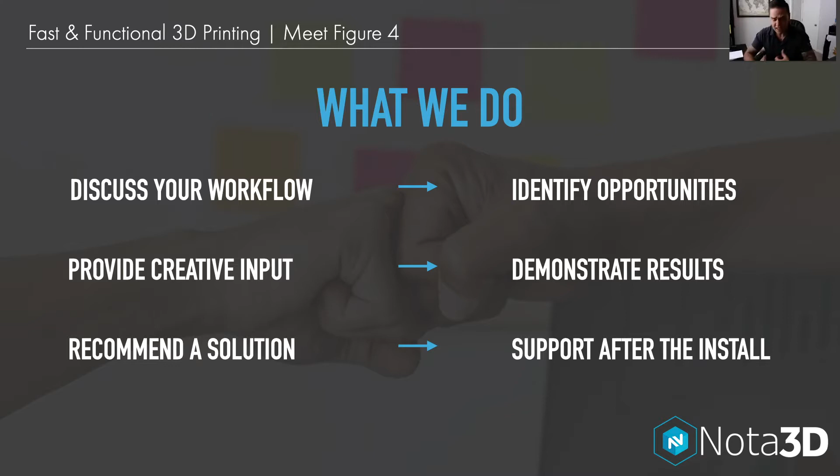So today I'm going to introduce you guys to the Figure 4, and we're going to dive into where it's used and why. And then we're going to have Joe Corbell walk us through the 3D Sprint software that comes with all of our machines. And he's going to show you some cool features with that. And then we'll wrap up with an interview with Derrick Timm from Motorola, who's a current Figure 4 customer, and he's going to talk about his current experience with the equipment and the impact that it's made on them.

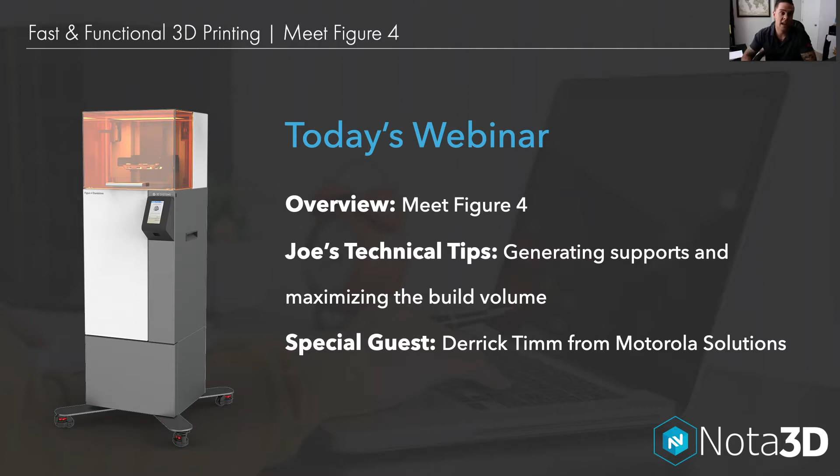Figure 4, even though it's a very new technology, it's actually got a pretty cool story. So Figure 4 was actually thought up back in the late 80s by Chuck Hull, who is the founder of 3D Systems and the creator of 3D printing. If you didn't know, Chuck Hull invented SLA back in 1983, which was the first 3D printing technology.

So the way the Figure 4 technology works is there's a UV projector below, and then there's a resin tray with a clear membrane on the bottom, and obviously that holds the resin. And then you have the build tray on top.

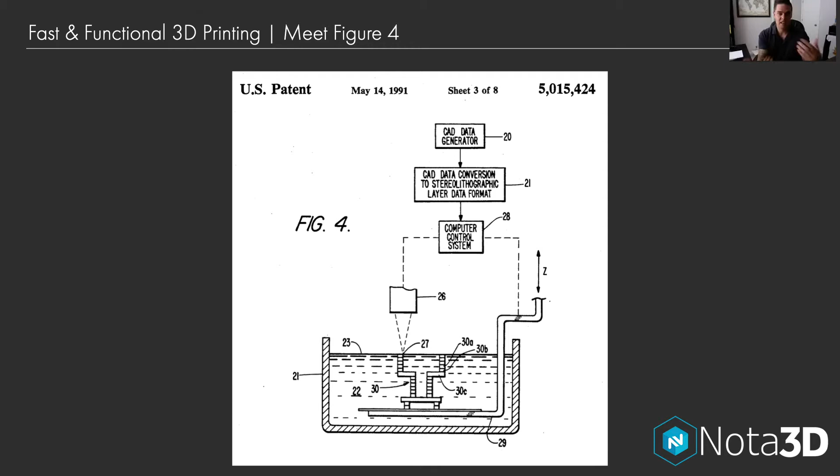The build tray lowers into the resin tray until there's a very thin layer of oxygen or resin between the membrane and the build tray, and then the projector flashes, curing the UV resin, and it's curing an entire layer all at once. So it's not drawing and filling like a lot of the laser-based or extrusion-based technologies.

So though there are many reasons why companies do choose to implement Figure 4, there's 4 key reasons that really get people's attention when we're talking about the Figure 4. These are the reasons why most companies find that it's a good fit for them. Speed is obviously the #1 factor with Figure 4. This machine is super fast.

Unlike many of the other technologies that I was explaining, which are either laser or extrusion based, they have to outline and then fill the parts. Figure 4 is actually using a projector, and it's flashing the entire layer, and that's why we can get the continuous build that's going to be really, really fast.

So it doesn't matter whether there's one part on the tray or there's 10 parts on the tray. It's going to build in the same exact build time. This machine will print up to 4 inches per hour in the Z-axis, which is crazy fast compared to other technologies.

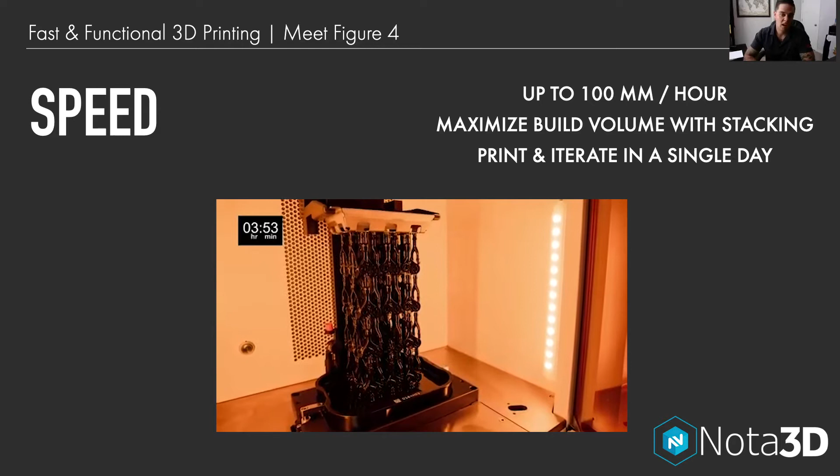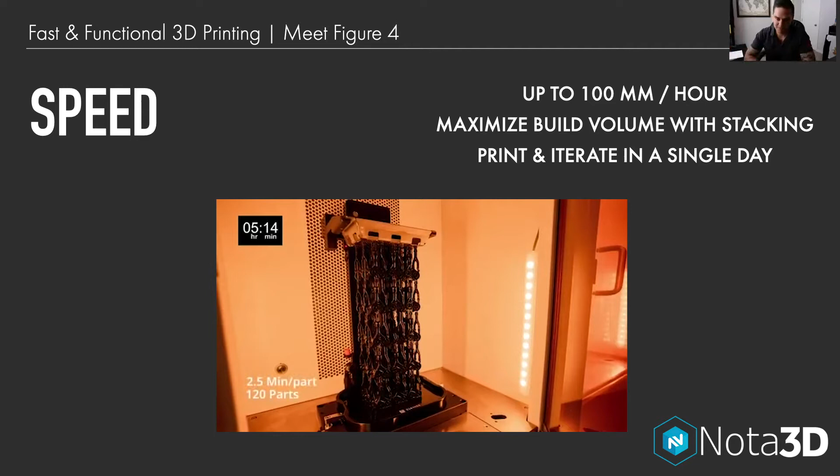And you can actually nest parts vertically to maximize throughput and print numerous iterations a day. Joe's going to dive into the stacking and nesting vertically when we get to the software portion. But we have customers that have brought in the Figure 4, and a lot of times they would have to press print overnight, come in the next morning and have their part done, and then they'd have to make a change and maybe press print by lunch, and it wouldn't be done before they left, so they'd have to wait for the next day.

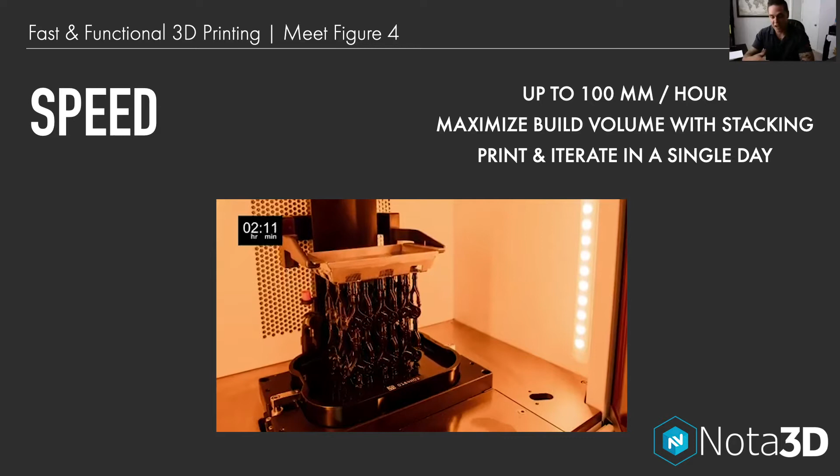So Figure 4 gives you the ability to come in the morning, press print, test it, make revisions, and print the second iteration all before lunch. So that really gives you a huge advantage.

And this is a great example, very relevant with everything that's going on, but rarely is speed more important than when it comes to saving lives. An Italian hospital found an urgent need for supplies when they ran out of a key component for the oxygen tubes, and the supplier wasn't able to keep up with increased demand, so they had to turn to 3D printing. The original part was brought to 3D Systems at 11 a.m. so they could get to work reverse engineering it, and by 7 p.m. they were able to present the hospital with 3D printed versions, which were successful. So production immediately ramped up using medical grade materials on the Figure 4.

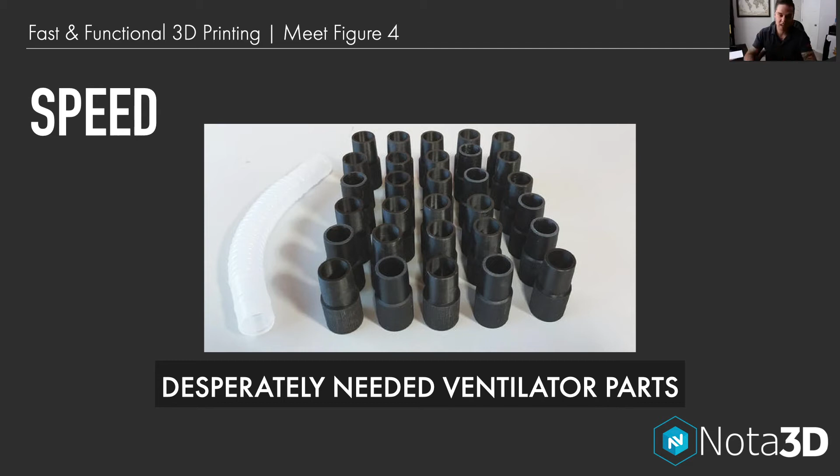So that's a pretty awesome story that in about 8 hours they were able to take a part, reverse engineer it, test it, prove that it worked, and then start mass producing it on a 3D printer.

And then another huge factor for Figure 4 is the material options. So right now Figure 4 offers 13 advanced materials. We have several more slated for 2020 and 2021. Figure 4 offers a wide variety of production-ready UV stable materials that are being used for low-run production pieces. We have high-temp materials with heat deflection temps of 300°C. We also have robust tear-resistant elastomers, and some great functional prototyping materials. Another thing too is we have a handful of biocompatible Class 6 autoclave capable materials as well.

And then, a little bit more unique, very niche applications, but we do have some application specific materials such as our J-Cast Green for investment casting for jewelry. And then we also have a material that is designed for eggshell molding. So that's our eggshell amber material. Eggshell molding is an application where a company needs true silicone, and that's kind of been an elusive thing in the 3D printing industry, getting a true silicone that actually functions and looks like a molded product.

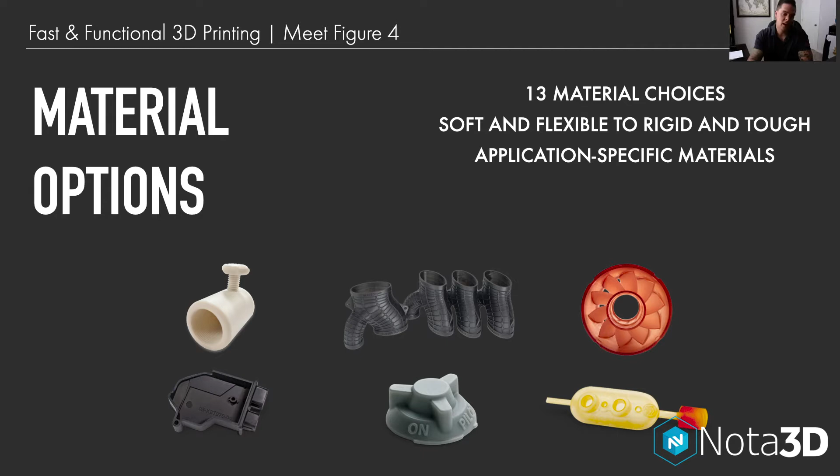Since Figure 4 uses a small resin tray, this allows for extremely fast material changeovers with absolutely zero waste. So for the Figure 4 standalone, essentially all it is is removing one resin tray out of the machine, placing it into a storage container that comes with it for safekeeping, and it doesn't let any dust or light get in there. And then you pull out a second resin tray with your new material already loaded in it, put it into the machine, and you're ready to go. This can be completed in under 20 seconds.

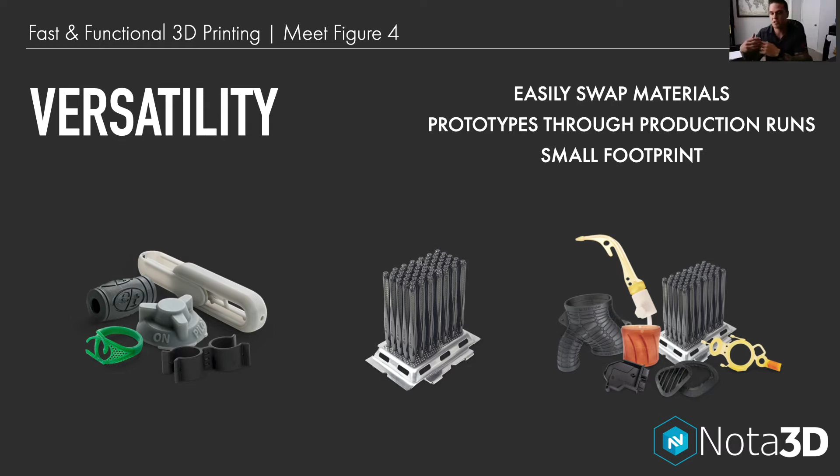And our materials allow for a vast range of applications from prototyping to production, automotive to healthcare, injection mold plastics to eggshell molding. Figure 4 really gives you the ability to handle multiple applications and do it quickly. Plus, it's got a small footprint, so it really can fit anywhere. It doesn't require any special ventilation or any special equipment to be able to run.

And then, of course, pricing is a big factor. So, we offer full turnkey packages on Figure 4 below the 30K mark. They're available to purchase outright, or we can also do leasing. And where we see leasing really fit is some companies will lease a machine, lease to own, and the revenue that they're going to generate or the savings that they're finding will exceed the monthly cost. So essentially, it's getting paid for as you go along.

And you can also grow with the Figure 4. So we have the Figure 4 standalone, which is our entry level. This is a self-pour machine, and it's very easy to run, but it's one unit. It doesn't connect with anything else.

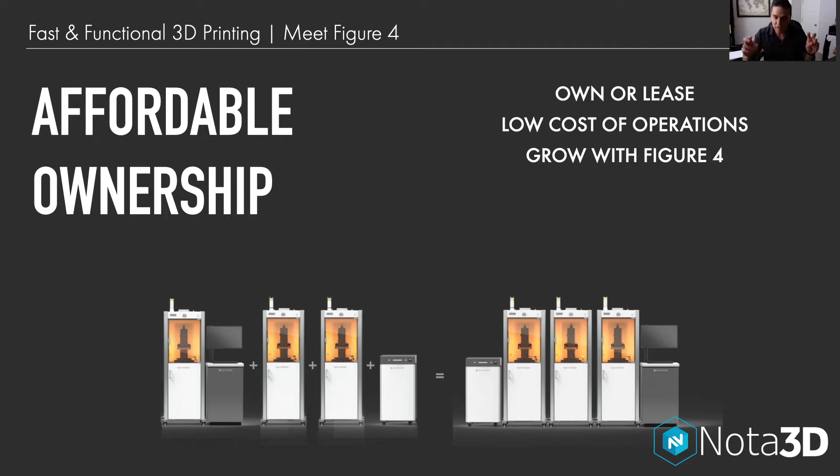And then we also have one level above that called the Production. This is a fully automated, fully customized, tailored to you solution where essentially you press print, it prints. There's a robotic arm that cleans the part, post-processes the part, and you pretty much just have the parts at the end of it. So we do have upgrade paths. So if you want to start with a Figure 4 Standalone, we do have trade-in paths and ways to grow with you guys. So this is something we see customers doing when they're wanting to kind of get their feet wet and then move into higher run production.

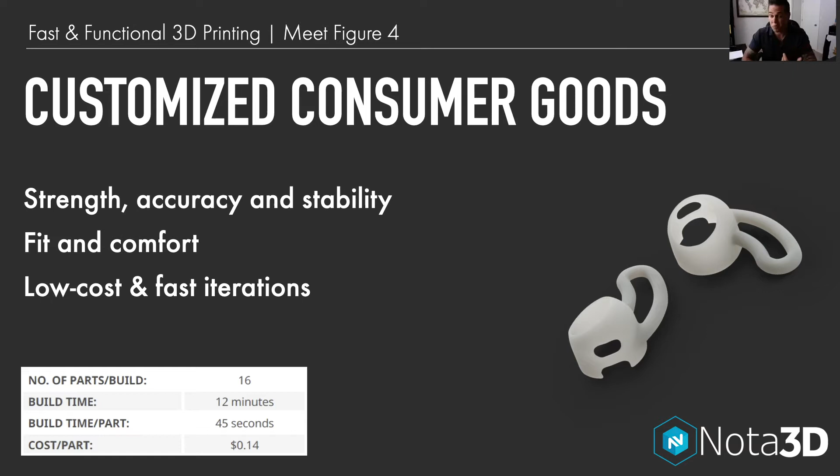Figure 4 allows for customized or personalized products because of the speed and the accuracy, and due to the production-ready materials, it really gives you a customizable production. So you're seeing this make a splash in industries like hearing aids, and as you can see from the build stats, we're able to print 16 of these shells in 12 minutes, which is less than 1 minute per part, and about 14 cents per part.

And then this is an area where we're really starting to see things grow, and that's low run production of spare parts or obsolete parts. So this allows companies to create what we call a digital warehouse. So they no longer have to store tools and molds for old products, and they can just store the CAD data on a server and print them as needed.

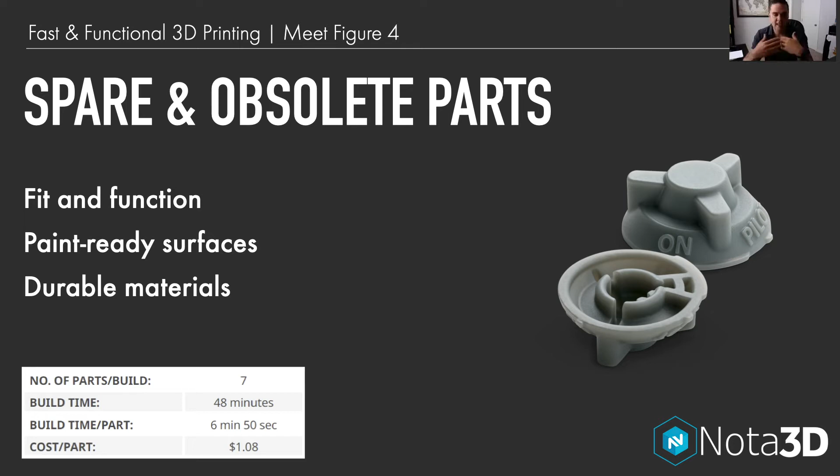So we see this a lot with older legacy products where maybe a machine or a tractor or something is 50, 60, 70 years old. The manufacturer doesn't want to hold on to everything to make these spare parts. So this is where it becomes really, really effective, and the parts can be chromed, plated, so you can really ramp up the spare parts business on that.

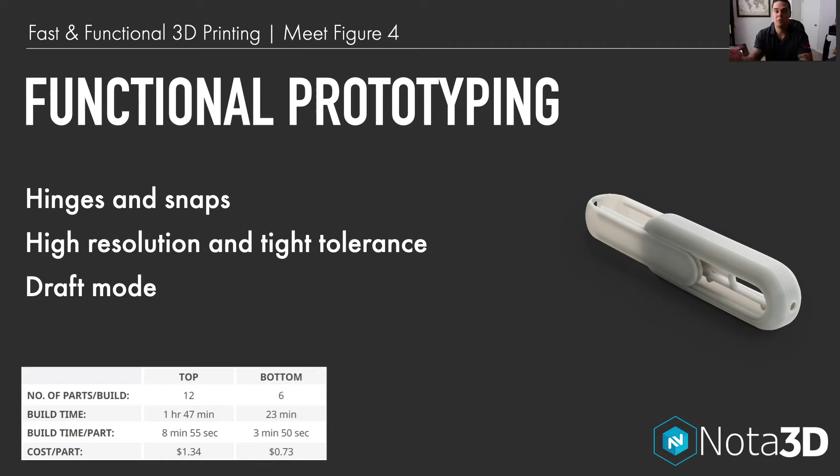Since the Figure 4 has production-ready UV stable materials along with the production accuracy, this makes Figure 4 a great fit for truly functional prototypes. So functional prototypes gets thrown out very loosely nowadays, but the Figure 4 really offers prototypes that need to go out in the field for rigorous, extensive testing, and these are parts that can provide you true feedback on what you would be able to expect from a final molded product. So I think that's really, really important.

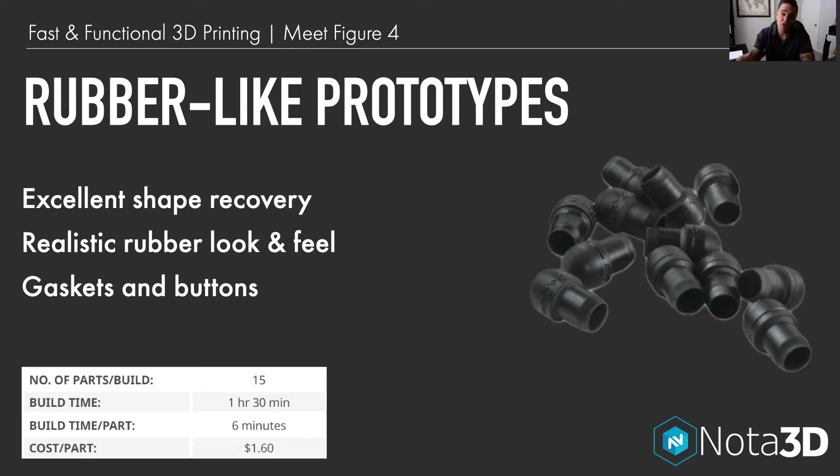And then following up on the functional prototypes, we also have functional rubber-like prototypes. So elastomers have always been an issue in 3D printing. Yes, you can print them, but the tear strength was weak, or it wouldn't hold up to any actual functional testing. But with Figure 4, these are significantly more robust. Still not a true rubber, but it's an incredible improvement to what else is out on the market.

So we also have virtually no waste, and our material can sit in the tray for extended periods of time, unlike the competition that requires you to basically dump out all the material that was not used in that one particular build for specific materials. So, overall, Figure 4 is a great low-cost option. It's inexpensive to run. It's got a low price point for purchase, and it offers a really wide range of materials, fast and accurate builds. So it really gives companies a great advantage.

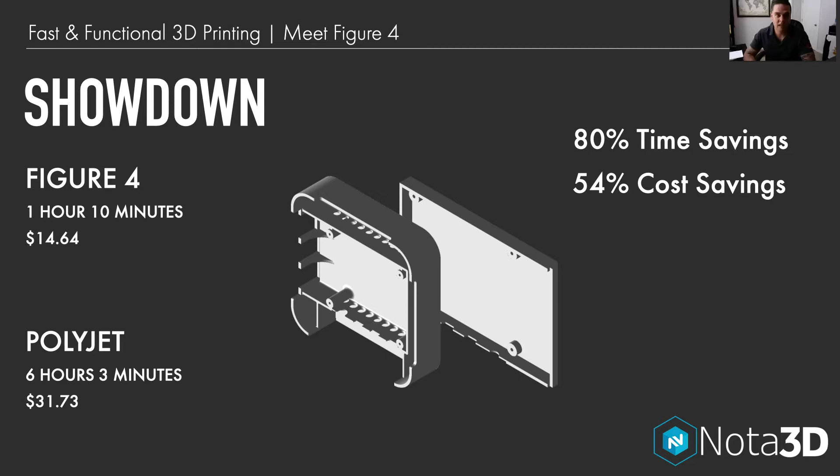So now I'm going to kick it off to Joe. So Joe is our applications engineer over here, and he's going to walk us through 3D Sprint. 3D Sprint is the software that comes with all of our equipment, but there are certain features that are going to be tailored to specific machines.

And so if you joined our webinar last month on MJP, Joe walked through some great features on that. Now he's going to dive into some different features that are specific to Figure 4.

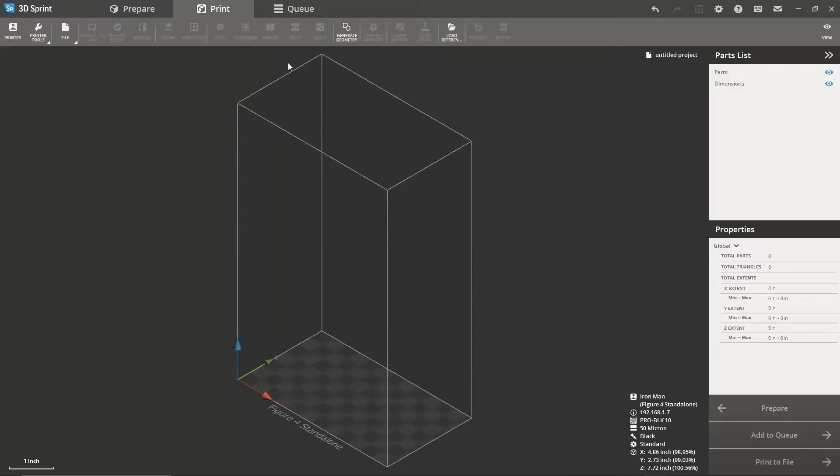All right, so today we're going to jump into modification of support structures as well as nesting, and give an example of what you can do with the Figure 4 as far as custom supports go. The software does a really good job of generating the supports automatically. As you learn the software and the machine, it becomes a little bit easier to dictate where the supports should go, where you're pretty sure you're going to need them to have a successful build.

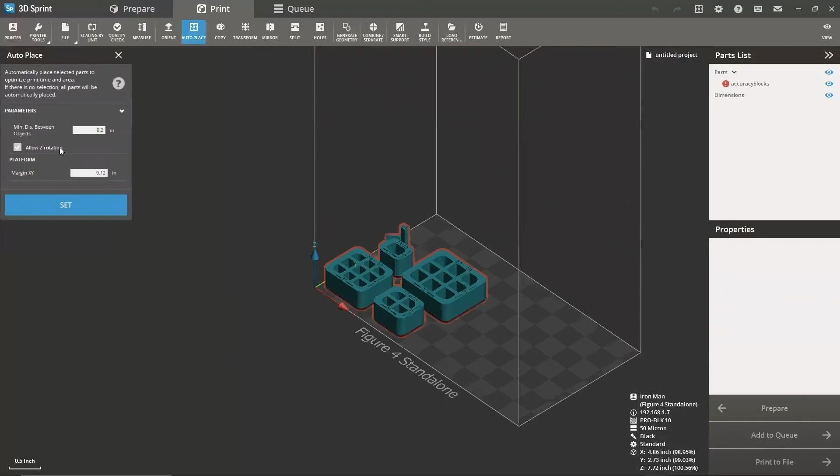So just to get a basic geometry, we can either generate the geometry, or in this case, we'll load our reference parts. It's a preset part to check the calibration of the machine. Really nice and easy. It's outlined in red, so we know it's slightly off the build platform. So we will auto place, allow Z rotation, and that'll center it in the build platform for us. We can see there's a little bit of a buffer between the parts and the build plate. That is for our support generation.

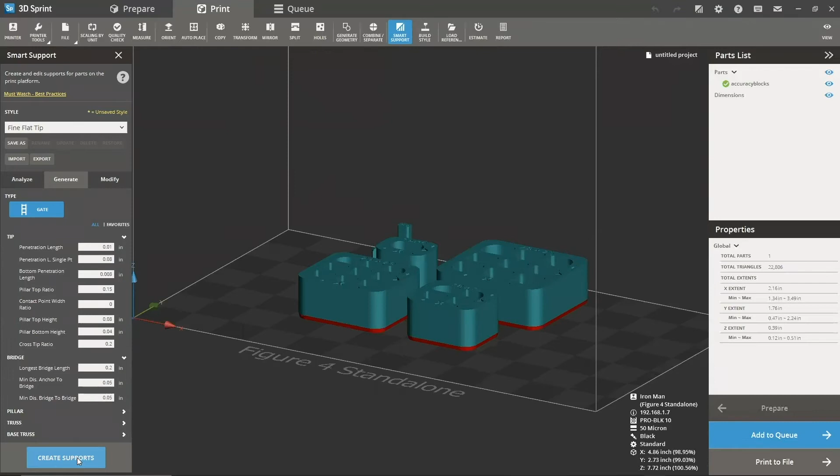There's a number of different presets you can choose from. You can offset the tip penetration length, the single point penetration, a wide variety of different parameters based on your level of knowledge or comfort with custom support generation. I'm just going to roll with the generic support structures here. It generates that, and you see we have our base, our pillars, our touch points, everything you would need pretty well automatically generated.

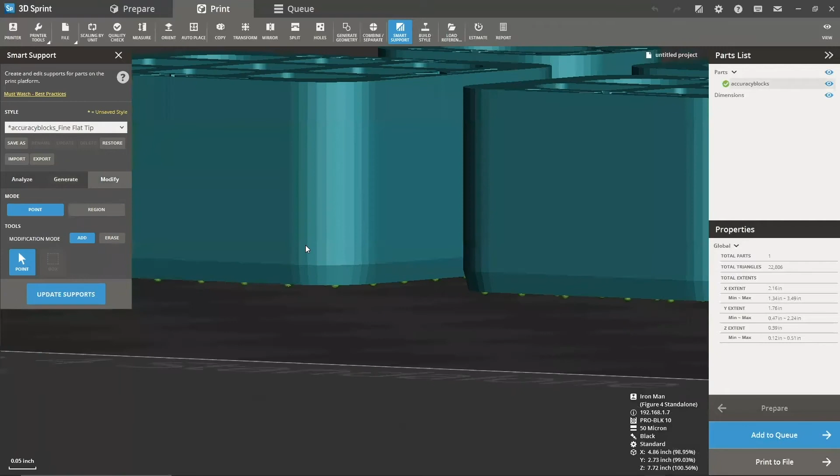From here, we can click over to the Modify tab, and basically anything outlined in red on the parts is going to need support. It's a downward facing angle, so that will have support on it. All of our little touch points here were automatically generated across all 5 parts. We could choose to add or delete points just by clicking. It makes it really easy to add.

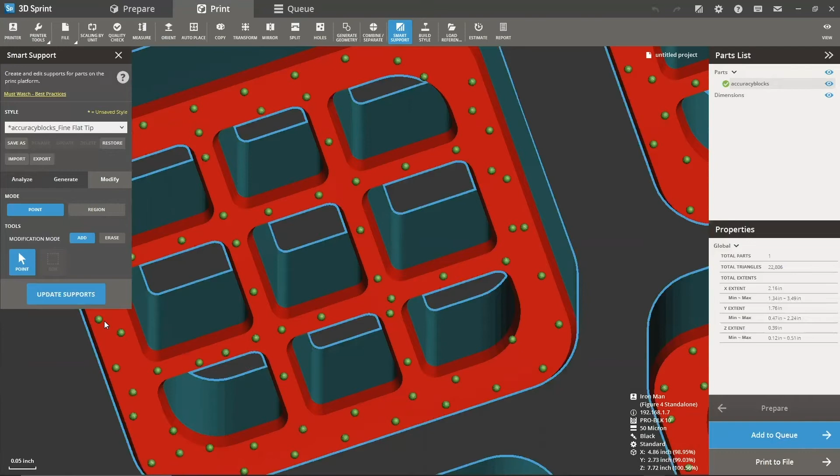If you have a larger part and you fear one of the corners might peel up, you could add support there, or for rounded pieces, you could add support along the edge to make it a true round. Really minimize any issues you might have. Once you're done, click Update Support. I have done it so many times where I've put a half hour or an hour's worth of work into something, not hit update supports, and lost it all. So don't make my mistakes.

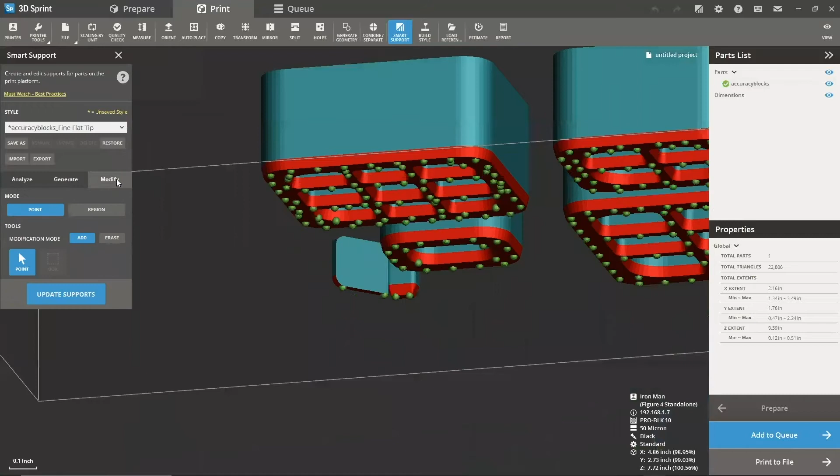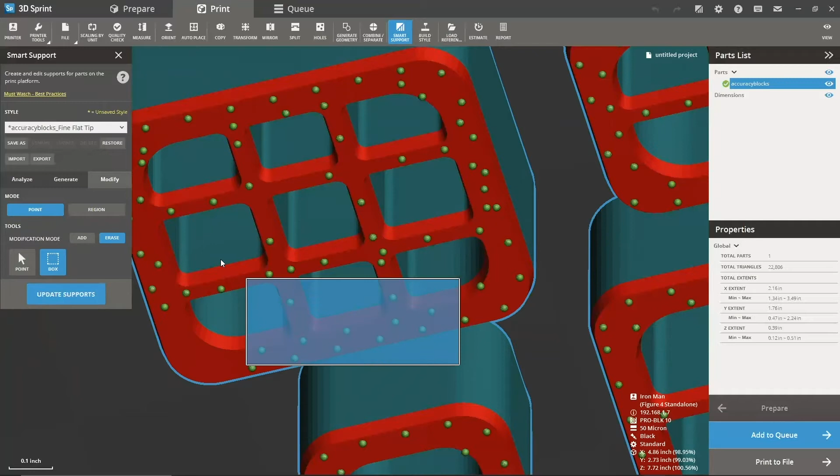Along with adding supports, I mentioned you can delete or erase them. You can go point by point and delete them one by one. Or if you want a quicker method, there's an outline box you could use. Just highlight the points you want to get rid of and get rid of everything there. Again, update supports, and that piece wouldn't have support. It probably wouldn't build, it would just float off into the tray. So in that case, we can highlight it again. And there's our supports again.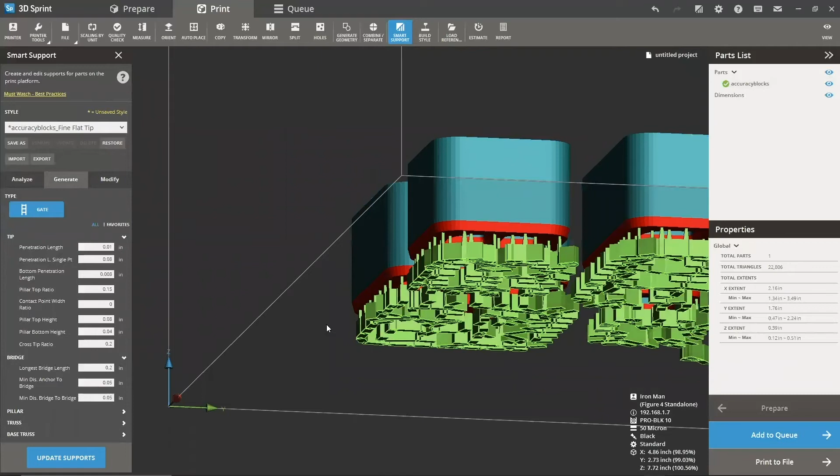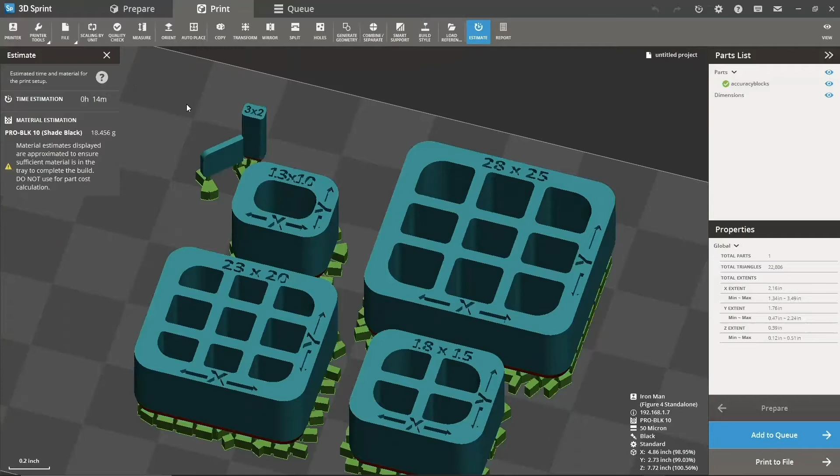From here, we can take our build estimate based on the parameters set for the machine: 50 microns, standard build, about 14 minutes to build these accuracy blocks. You can see the millimeter measurements, 28 by 25 for the big block, 23 by 20 for medium, and so on. To delete the supports, you just highlight, you'll see them outlined in blue instead of green, press delete, and you get rid of the supports again.

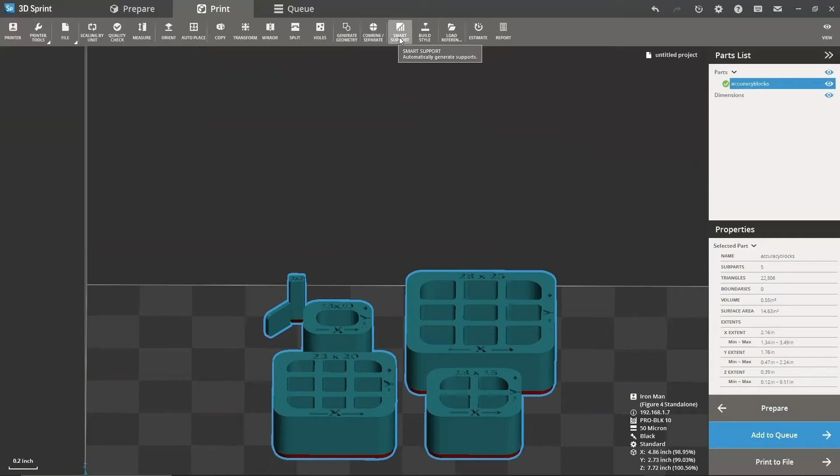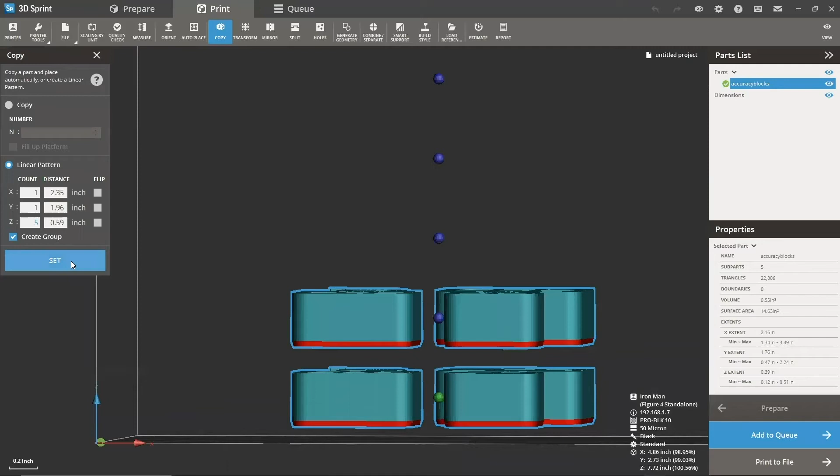We often get questions: can I stack parts in this build envelope? Yes, you can. It's going to branch off support structures from top-facing faces and add that buffer in between your parts. An easy way to nest parts with this machine would be copy, then under linear pattern, grow it on the Z. It only shows the first one following the line, and then dots indicating the rest of the layers. So it gives you a good idea of how much space you'll have between parts, and you can offset that by changing the distance.

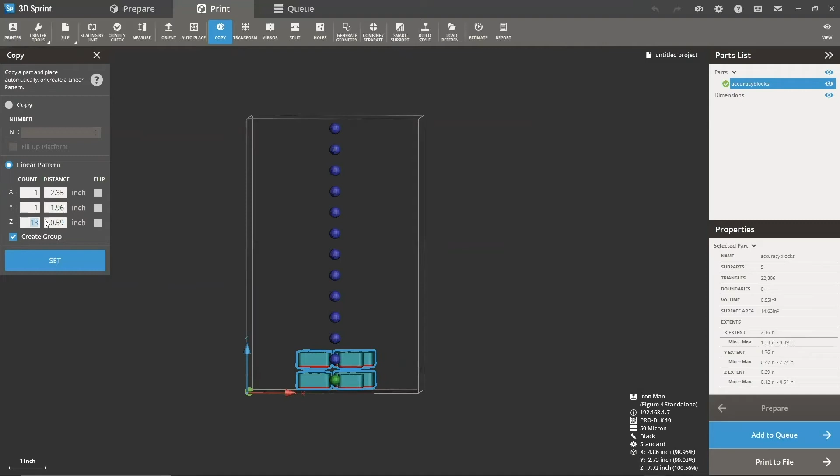For this, I'm just going to leave it as it is. Try 10 layers. We could probably go even more. 14 is too many, so we'll do 12. We set that, and they all stack. Really nice and simple way to nest. From here, we'll generate the supports. Yes, a single support can be generated for multiple parts if combined. Do we want to combine the parts? We'll say yes, because the parts are stacked in this case. Highlight our parts, close these out, and create supports.

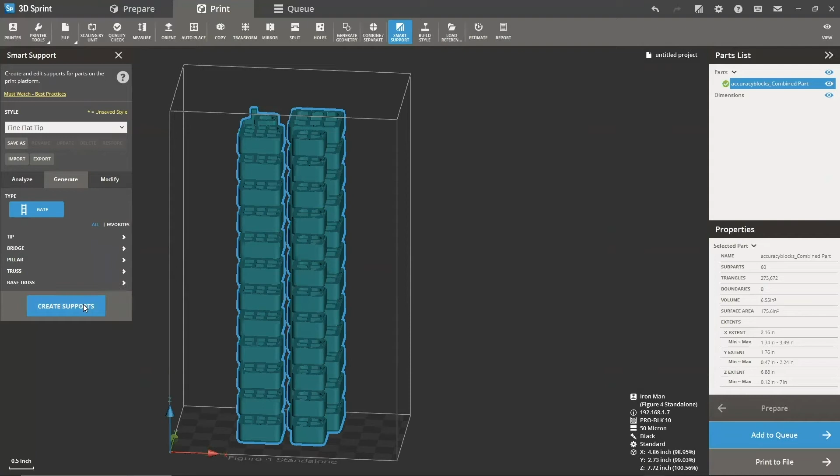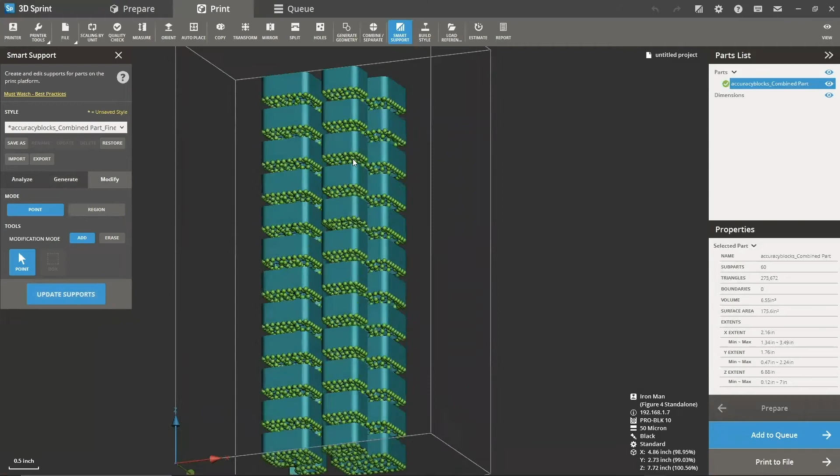So once the supports are generated, you can see here pretty easily, everything's really well automated. You don't have to adjust any of the support structures here. You can by going back into our modify, and you can see all of our little touch points. We hit update supports. And if we hit update supports again, it'll just bring all those back for us. So really a nice hands-off or hands-on, depending on what you're looking to do with your parts.

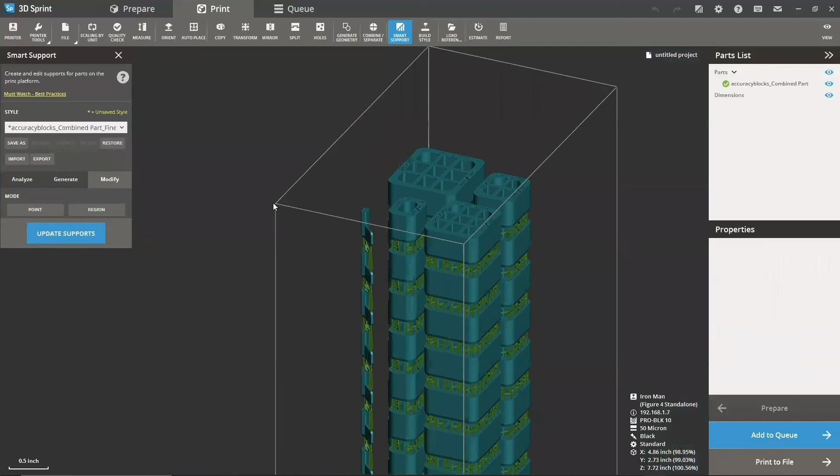So they make this software really simple. If you want to be hands-off, you can. Here, instead of just the one layer, now we have multiples. You can do this with different parts. It doesn't need to be just the accuracy blocks, or it doesn't need to be just one set of parts. You can copy your entire first layer up to the top. The software does a pretty good job of grabbing everything you would need, building everything the way you would need it.

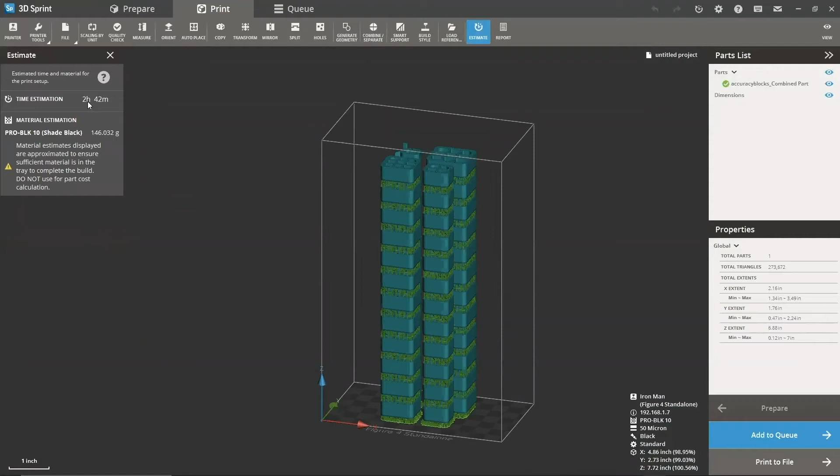So if we take another estimate, instead of the 14 minutes for the one layer, now we have 13 stack for 2 hours, 42 minutes. And that's a pretty easy way to nest the parts for a Figure 4.

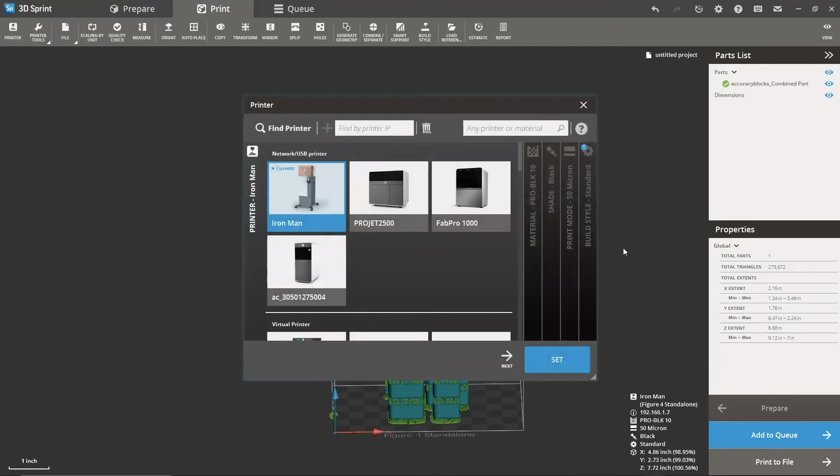So along with nesting on the Figure 4, something else you could really do to maximize your efficiency with the machine is to offset the build parameters. Right now, like I pointed to earlier, I have the 50 micron standard build. We could actually bump this up to 100 microns, since we know the vertical surface finish is not an issue for these parts, and we can build it in draft mode.

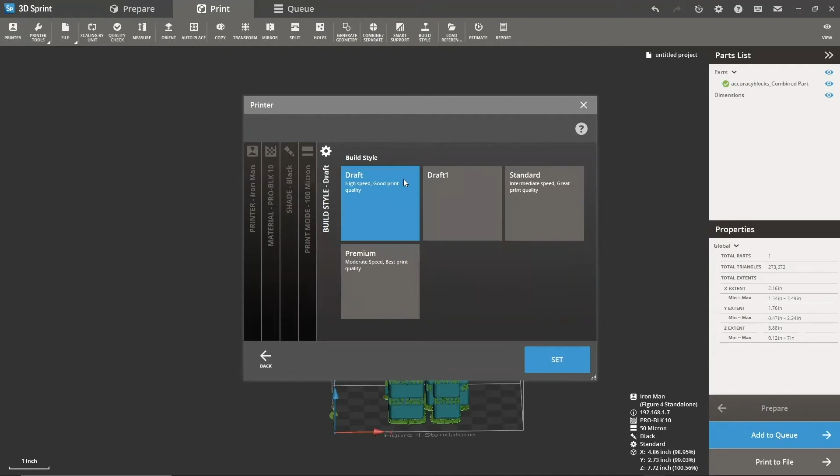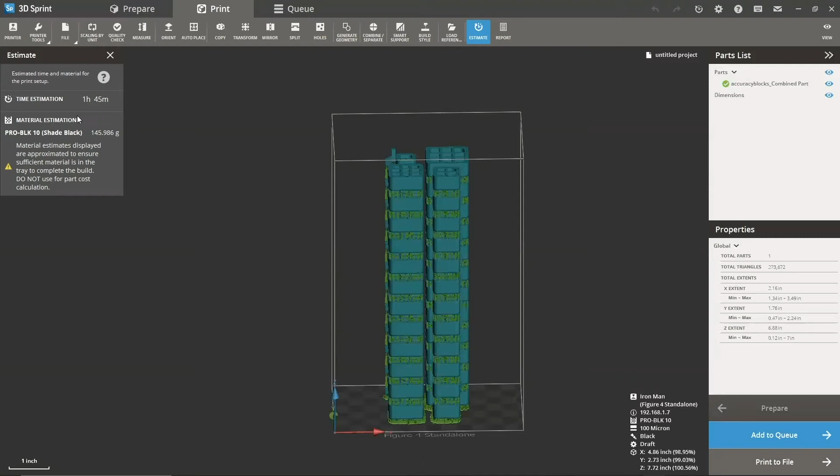And we cut our time in a little less than half. So that's pretty darn good. Going from the 2 hours 42 minutes down to 1 hour 45. Roughly the same material use, but really saving a lot of time there. Effectively doubling our layer height and moving from standard build mode over to draft mode. And at that, I'm going to kick things over to Derek Tim from Motorola Solutions.

For the last portion of our webinar today, I would like to introduce Derek Tim of Motorola Solutions Applied Technology Group. Derek has been instrumental in the product development and prototyping activity at Motorola for 6 years and was involved with the evaluation, justification, the purchase and implementation of 3D Systems Figure 4 3D printer. Derek, thanks for joining us today and sharing the challenges of your responsibility at Motorola and your experience with the Figure 4. I'm sure many of you out there joining us share similar obstacles to what Derek may encounter in your companies. Derek, could you tell us a little bit about what you and your staff does at Motorola and how 3D printing has benefited that activity?

Yeah, sure. Thanks for having me. Here at Motorola Solutions, the Applied Technology Department, we focus more on unique solutions for our customers. So our volumes tend to be much smaller. We're not selling millions of products. We're selling from 10 to 100. So we really need something that can prototype very quickly because every problem is very unique. So 3D printing has really come in and helped us in that area.

We used to have to go out and machine each part and check it one by one as we iterated. And now that we've moved to 3D printing, we're able to do that on a scale that we never did before. And this new printer especially has really escalated that speed as well. So where we used to be able to 3D print either in-house on our own machine or out of house in a matter of a couple days, now we're able to do it in a matter of a couple hours.